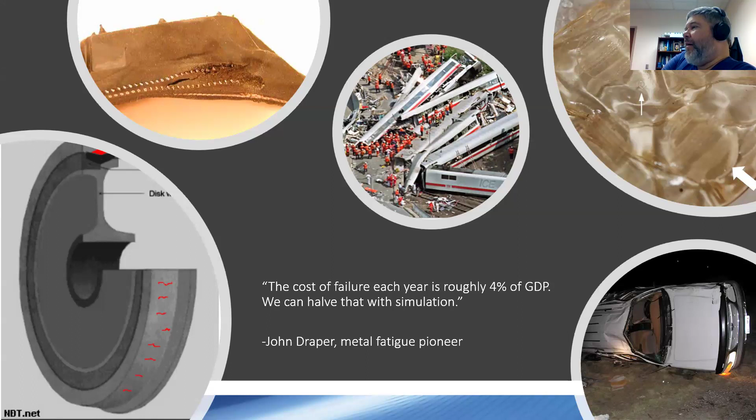Around the edges of the slide, you can see some of the more infamous rubber fatigue failures that have happened out there. In the upper left, there's a picture of a tire - that was the Ford Firestone tire failures from the early 2000s. There's a rail accident caused by failure of a special rubber tire wheel for rail that led to a train disaster. We think of the Dow Corning breast implant failures from the mid 90s. These are all examples of times when durability didn't work out right, and led to huge economic losses.

So here's a quick approach, the agenda for how we'll approach this. First of all, I want to talk about the technology, and not only the technology, but Endurica's approach to bringing this technology. The words I've used are accurate, complete, scalable - that's kind of our mantra for the Endurica tool set. We'll talk about the kinds of materials testing we can do, the kind of software. You should really think of Endurica more as a toolbox than a single workflow or a single piece of software - it's more a collection of things.

But the workflows that we provide are really aiming to give you tools that are very accurate. They've got the right material models, the right algorithms for doing damage analysis, the right materials testing, and they're solutions that are easy to quickly deploy when you need them. So just to briefly introduce the tools, but the meat of this talk is all about the impacts on business model and how we can quantify that.

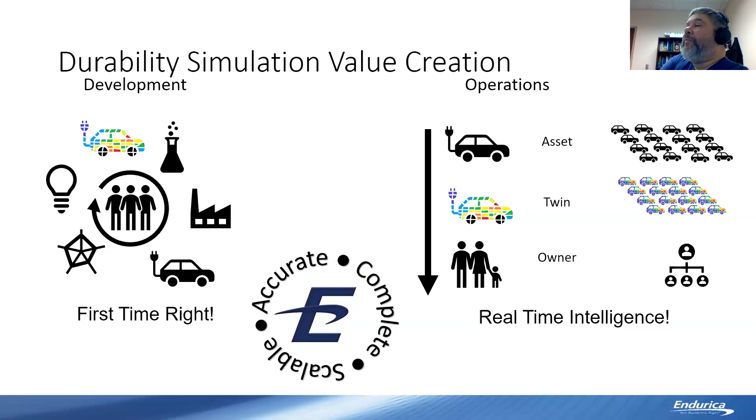So the Endurica tools really kind of support both types of application. And again, our mantra is accurate, complete, scalable. So let's talk a little bit about what we mean by accuracy.

First of all, on the material behavior side, rubber is very different from metals. There's obviously codes out there for doing metal fatigue, but even at a molecular scale, rubber is very different from metals. The material behaviors are very different. The math you use to deal with finite straining is very different from the small strain analysis, linear analysis that you use for metals. So you really need specialized tools for that.

These are just some images of a few of the types of things that we do. On the left, this is a crack growth rate curve that we've measured on some materials from Exxon Mobil. They have a thermoplastic elastomer called Santoprene, and we've got material models that can replicate and reproduce the kinds of crack growth behavior that their material has.

In the middle, there's what's called a Haigh diagram. It's a map of how the fatigue life depends on mean strain and strain amplitude. And that's for a project we did for the Army for one of their materials. That basically shows you the mean strain dependence of fatigue life for their materials.

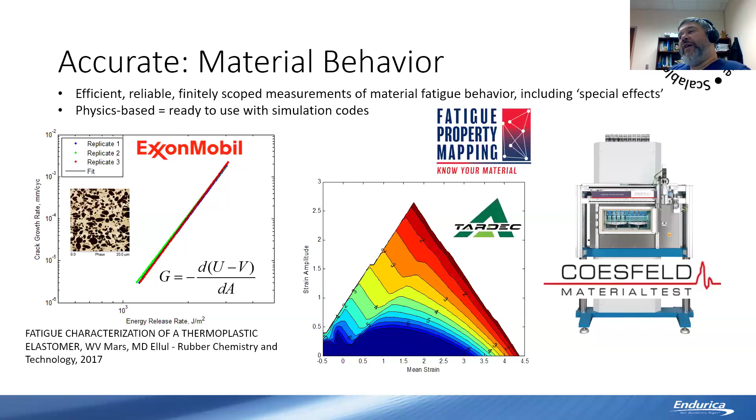We have a testing service called Fatigue Property Mapping that lets you measure all of the different special effects that rubber exhibits. We have testing instruments, and we partner with a German company, Coesfeld, for that. People can, and we'll get to this when we talk about scalability, but we've got offerings for if people just want to do a little bit of testing, we can handle that. If you want to do a lot of testing, we've got solutions for that as well.

Another component of the accuracy side of things is we use an algorithm called critical plane analysis. The idea in critical plane is that you assume that there's a crack everywhere in the part, and you evaluate every single possible crack that might exist in the part.

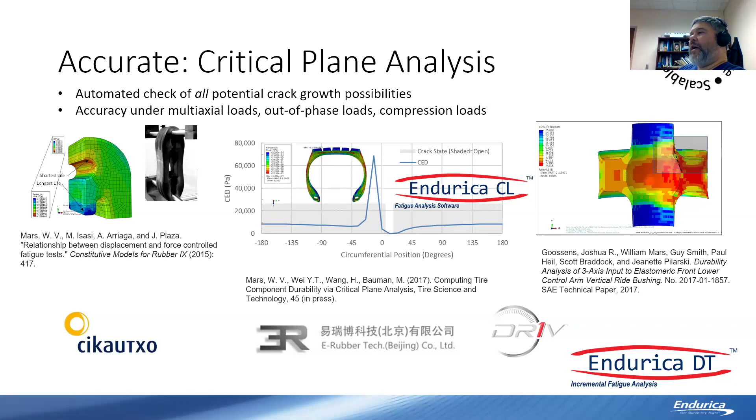What's really powerful about critical plane is that it allows you to make accurate predictions when you have multi-axial loads, multiple load input channels, loads that are out of phase, and accuracy when you have combined tension compression cycles. So when you have very complex loads, critical plane is the way to do it. This is not a technical talk, so I'm not going to unpack that very much, but that's a really important technology that's kind of core to our tool set.

The last point I'll mention on the side of accuracy is that our tools also allow you to deal with the variable amplitude side of fatigue problems. So if you want to work with road loads, a recording from the track, say, or maybe results from a vehicle dynamic simulation, we can handle that. We've got damage accrual algorithms that allow you to see where the damages come from, when it happens, so very, very powerful tools. These are in use by automotive OEMs to do their design work.

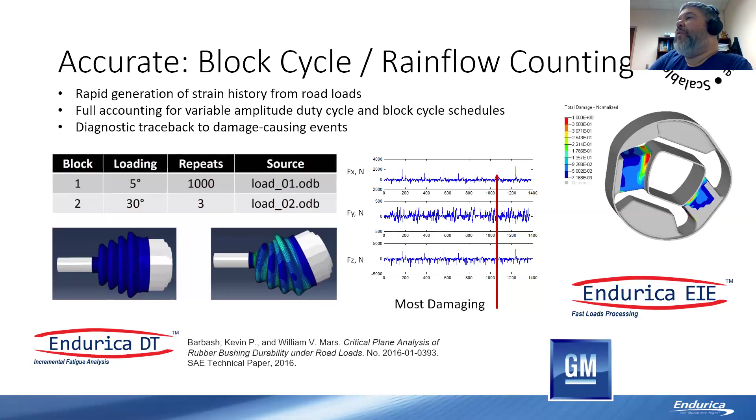So, not going to focus too much on the technical side. That was the accuracy. I mentioned accuracy, completeness, scalability. On the completeness side, I just want to mention that we've got three tools: one is called Endurica CL, one is called Endurica DT, and one is called EIE. CL is, you can think of that as kind of the core solver. DT is our incremental solver, and EIE is a tool that allows you to look at road loads.

These three tools allow us to cover pretty much any type of fatigue analysis problem you might encounter. If you want to do infinite life analysis, looking at a fatigue threshold and trying to stay below it, we support that with the CL tool. If you're doing safe life analysis, looking at number of repeats of some load case or schedule of load cases, we can do that with our CL and DT tools. And if you're looking at a damage tolerant approach, we support that too, tracking damage development through a series of load cases that's always changing, looking at the evolution of residual strength or residual life in the part as you put more history on it.

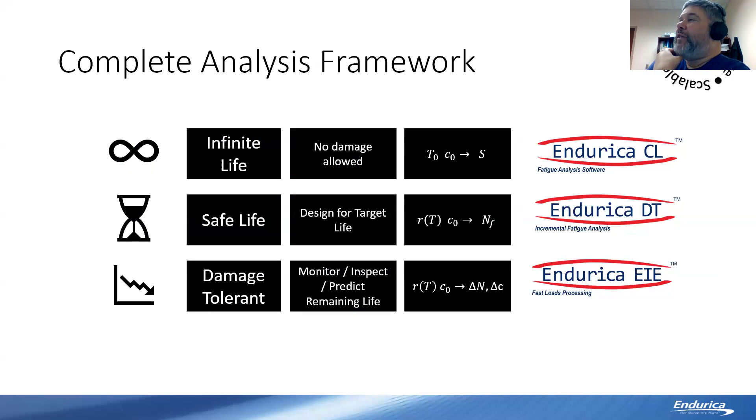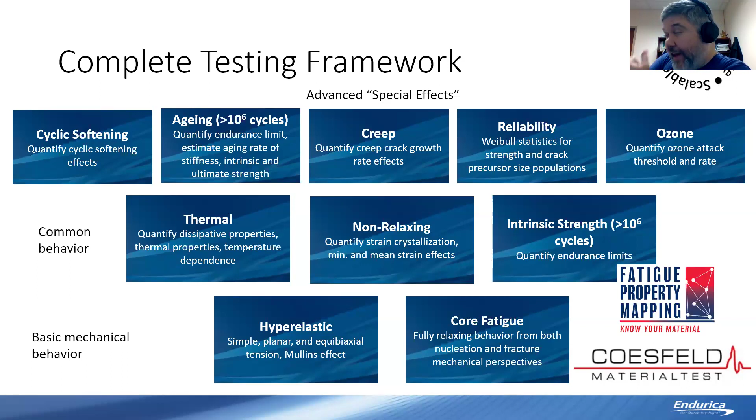This gets to the topic of completeness. We have a workflow for just about any type of durability problem you can bring to us. We have materials testing for all of the different components of the physics in the rubber. We have a service called Fatigue Property Mapping, where people send us samples of rubber, we test them, and give you back basically a material model you can use with our code to do fatigue calculations. We also help people implement these test methods in their own labs if there's a high enough volume of testing to justify that.

The last point on this topic is that our solutions are scalable. So if you're doing zero fatigue life prediction on day one, how can you very quickly scale up? For example, people sometimes start with just using consulting services, not even taking a license of the software, just coming to us with a project, and we can help you with that. We do have a materials database, so if you don't have the luxury of measuring the material properties for your material, maybe we could find something that's like your material in some ways.

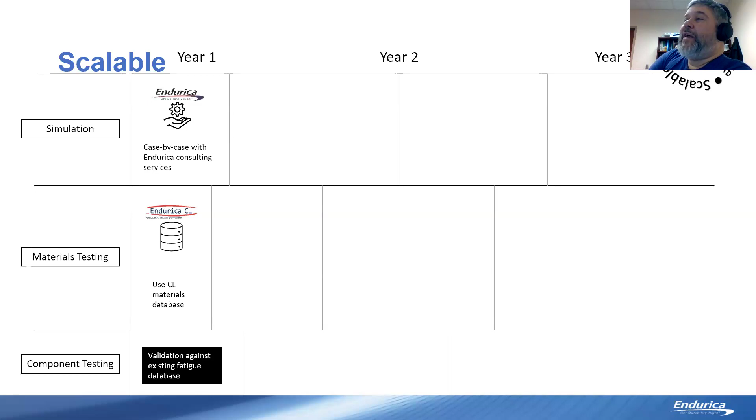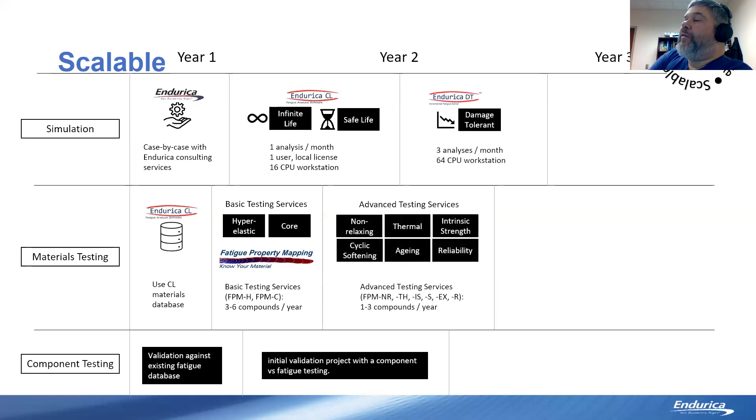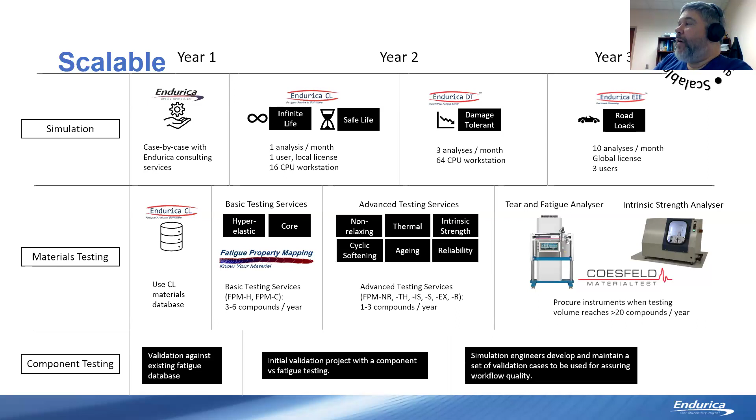But what's really beautiful is there's a path towards, as the need and the validation case gets strengthened, you can very quickly ramp up your adoption of the tools. A brand new user might be using our infinite life and safe life analysis approaches, just the basic testing to look at stress strain behavior and basic fatigue crack growth behavior. You might start some validation projects on a component to gain confidence with the workflows. At a more advanced level, you can talk about doing damage tolerant types of analysis, start adding in some of the additional physics that happen in certain problems, and eventually you can even get so far as doing analyses on full road loads using our tools. So there's a path to bringing these tools to bear on these problems at pretty much any scale.

Okay, so that's a quick introduction to Endurica, the company, and the basket of tools that we bring. So let's switch tracks now and talk about how these tools create value.

One way these tools create value is they provide a competitive advantage to part suppliers who are seeking the business of OEMs. Typically an OEM, a car maker, will put out that they'll seek bids on new business. They'll say, 'Hey, I've got a new car program coming out in a year or two, I need to get 1 million bushings to put in these cars. Let's take this to 3 suppliers and shop it around and see who can give us the best package.'

Obviously pricing is important in that, and other details, but in those packages there is often a significant engineering component. When people bid on these business packages, the timelines are often pretty short, but the OEMs really want some kind of validation or evidence that the design being proposed is going to be adequately durable under the intended use. They also want to know that the supplier has the expertise and the capacity that if an issue arises after the contract is put down, they'll be able to address the issue and make sure durability doesn't become a warranty problem for the auto supplier.

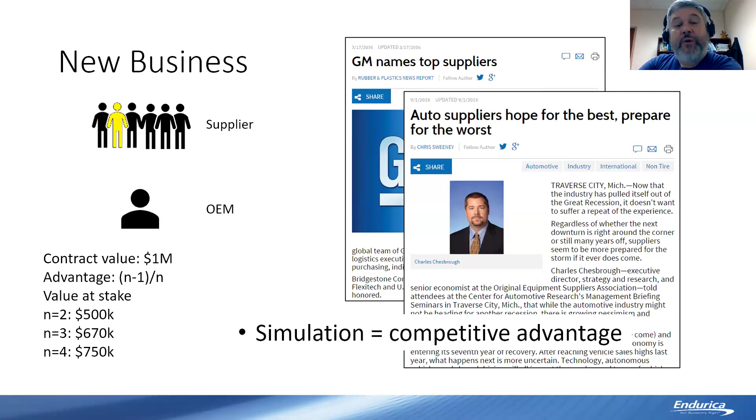A lot of the OEMs these days are pushing very hard to get people to show what they can do with simulation. Again, it has a lot of value in the new business phase.

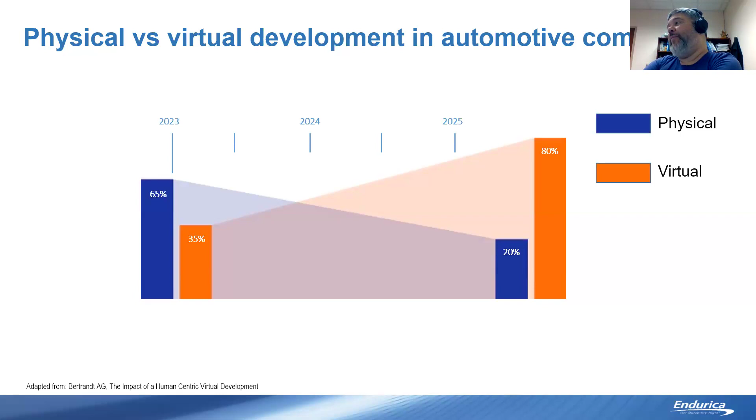This is a slide just showing the transition that we're living in right now. Some of the OEMs here in the States have given talks in conferences where they're talking about trying to really highly ramp up the virtual side just in the next 2 or 3 years. And again, it's all about engineering first, right?

This kind of is more related to the development process. So when you go to develop a new rubber part, there's a certain set of different types of efforts. You could think of a budget of how much effort goes into selecting the material, specifying all of the manufacturing details of the product, doing analysis to make sure it has fitness for loads and so on, building a prototype, doing all of the product testing.

You can lay out a budget, you can lay out a timeline. Having lived through this in a past life before I started Endurica, I think it would be maybe typical to say, if you're doing product development, maybe that's a team of 5 people. Each of those people is paid something like, in round numbers, $100,000 a year. And maybe that team takes 6 months to go through one iteration, right?

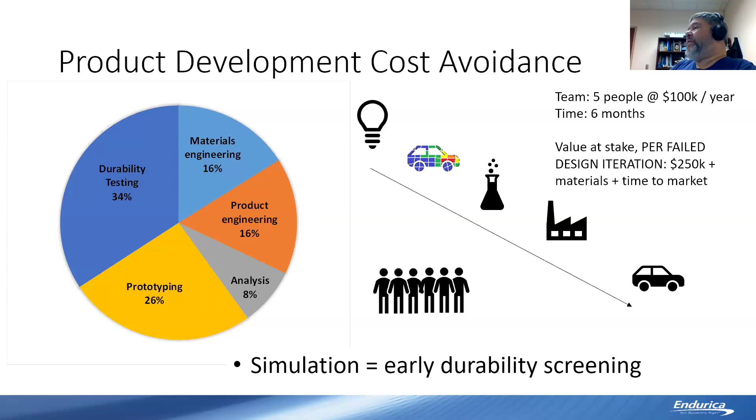Again, the value in simulation here can be estimated by what it saves you in terms of decreased risk of having to do another expensive iteration. And so this, like I say, again, simple model for calculating what that might mean in your context. You change the numbers to what your situation is, but that's another way to think about it.

We could also talk about lightweighting, and there's lots of ways to think about lightweighting. Of course, we've already talked about how to think about it in terms of competitive advantage, but you could also think of it in terms of a lot of rubber companies actually focusing quite a bit on just how to take material out of a part. The material itself has a per pound or per kilogram cost.

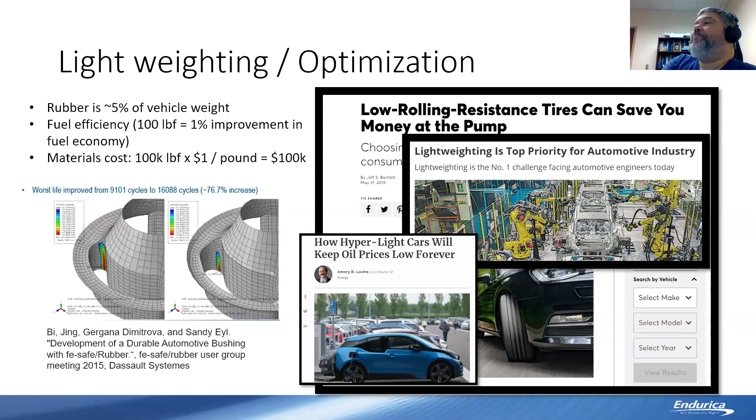If you know how much weight you're going to take out, you know how much material you're saving, you can calculate a contribution there. And this isn't even counting - I think usually if you make a lightweight part, that also has value to your customer, which isn't included in this kind of calculation. But anyhow, this is at least a conservative way to estimate. Now for rubber, this is huge.

This next one - material selection. There's been studies done that show that when you have product failure in the rubber industry, about 40 to 45% of the time in this study, the reason for failure can be attributed to poor selection and poor specification of the material. You specify a rubber compound that's too soft or too hard, not enough carbon black, too much cross linking. Poor material selection is just huge.

It's not surprising that this happens. Rubber is a very complicated material, and in the lab, rubber labs tend to use a lot of very simple tests that are in some ways oversimplified - they don't reflect the true service conditions of the part. So getting these decisions right more frequently can have a big value.

How do you estimate the value of that? Well, let's say you have 10 rubber compounders in your materials group, and you've got some salary for those guys. Let's say you change what I'll call the hit rate - before you start taking this seriously, maybe you're getting the right material and right application 50% of the time. If you can increase that from 50% to 2/3, there's a real economic value to that.

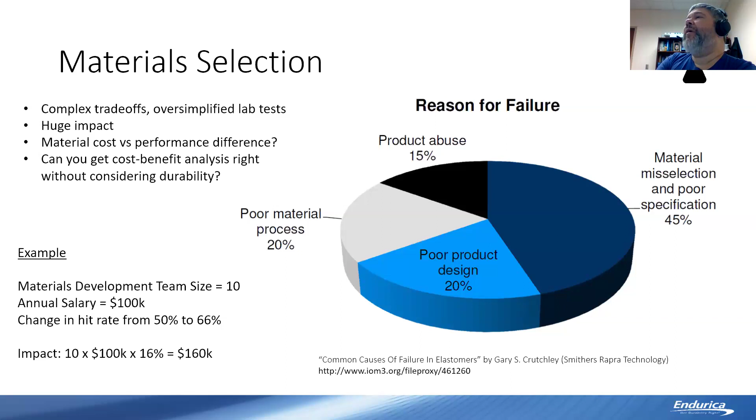Sustainable materials - sustainability is a huge topic these days. One of the difficulties when you want to implement a sustainable material strategy is that it requires you to change out materials that work for materials you don't know if they work. Anybody in development knows that most things you try don't work, so that's where these tools can really help - helping to sort the ones that will work.

I saw an interesting study online when I was looking for ways to put numbers on these kinds of things, and I found one study that showed about half of consumers are actually willing to pay more for a sustainable product. There's a pretty large group of people who would pay 25% more, and even a small group who would pay twice - 100% more - if they felt the product was sustainable. So there's definitely value in that, and the way simulation tools help with that is again helping with the get-it-right-the-first-time type of tactic.

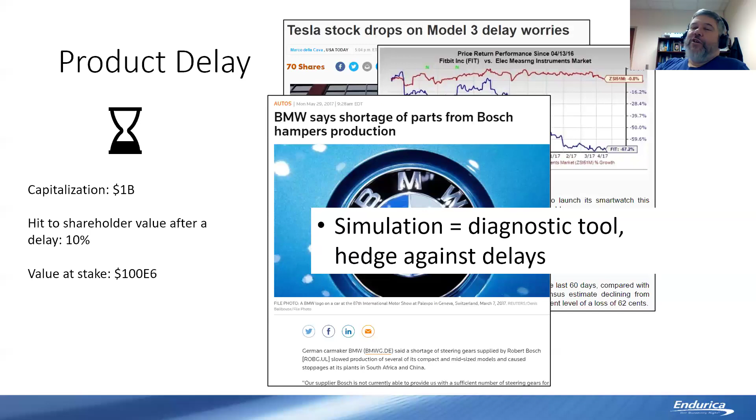That has to do with your first mover advantage in business, and that certainly could justify this kind of thing. But again, just another model for thinking about what durability might be worth. If you don't have durability, you don't have a product.

Another one I'll mention is what I call OEM warranty responsibility. A lot of part suppliers put their parts into a car, and the contracts they have with the OEM often have some kind of warranty provision, where if these parts come back from the field, there's some kind of economic adjustment. You're going to pay us for things that fail. The OEM needs the supplier to be responsible for the quality end of things and for failure.

So another model you can build out very simply to look at the value of getting these things right is to look at what your warranty exposure is. I think most companies track the cost they incur due to returned parts, failed parts from the field.

So if you had $10 million worth of parts out in the field, and you know some percentage of those are going to fail, let's say if you make the right decisions you can reduce your adjustment rate by 1%. Well, 1% of 10 million bucks is a person's salary for a year. So it's worth it to pursue these kinds of initiatives that will help you resolve these types of issues.

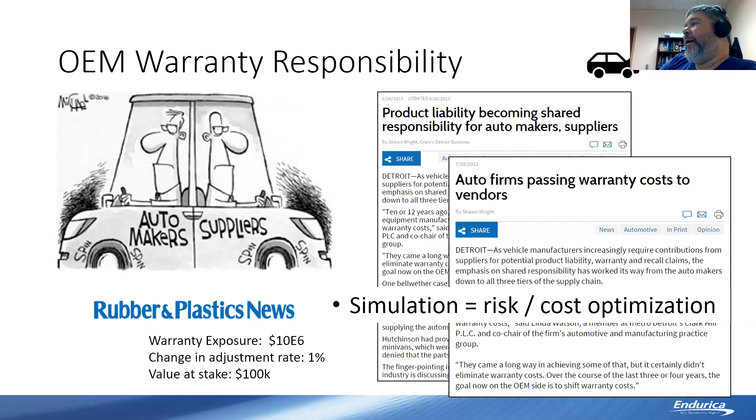So anyhow, that's a pretty good list, hopefully I've given you some ideas for when the boss says, well, why should I care? Hopefully I've given you some ways to sharpen your pencil and come back with some really sharp and incisive insights into how these things can benefit your business.

To summarize what we've said, you can look at things that are changes to the revenue side of the equation. We talked about competitive advantage, cost avoidance on the development side, lightweighting and sustainability, avoiding product delays, dealing with warranty type failures, and testing capacity in terms of less iterations. Take these models that we've given you and plug in your own numbers.

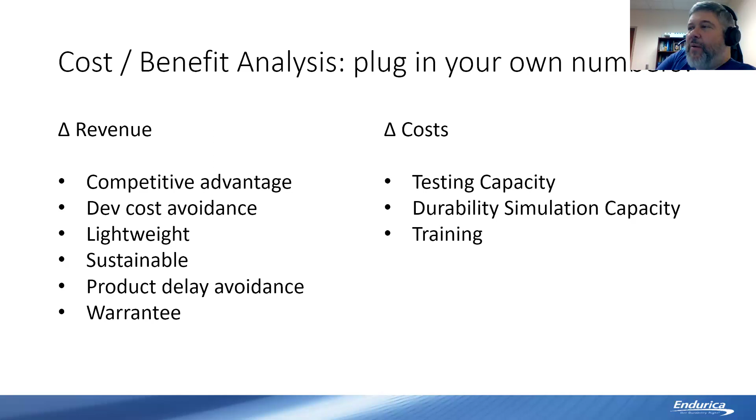I also want to mention some ideas of what I call fast tactics. So you get off this webinar and you think, that's all nice and theoretical and I can calculate a number, but what can I do at my company today that might start to create value? So I get a simulation tool, what do I do with it to immediately create some value where I am? This slide is just a few ideas on things that you might try to do.

One would be to implement durability simulation as part of your new business process. So whoever's writing the proposals to the OEMs for part contracts, you probably want to make sure durability simulation is part of that process. Being able to take the engineering package you get and come back a week later saying, we know this can pass and here's why, here's your loads and here's our analysis, is very valuable. And not so hard to implement these days.

Another quick tactic you could use is to do what I call a design audit of durability sensitivities on your existing product line. No doubt you have a bunch of existing products, and if you were to run simulations on your current products, maybe the ones that have the worst durability issues, do an audit and figure out, hey, what would be the sensitivity to durability if I changed out the material?

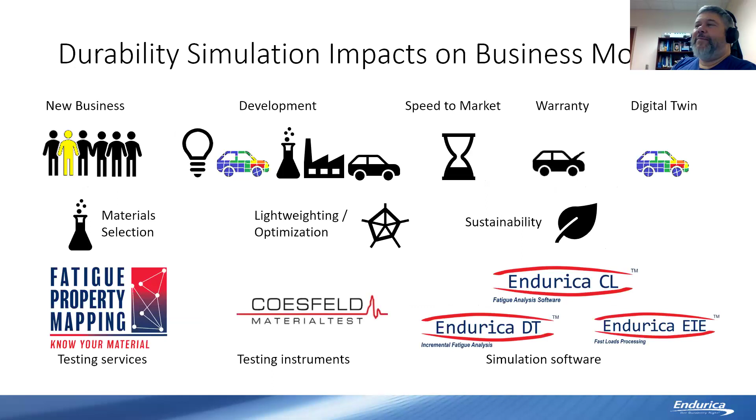Okay, so that's kind of the meat of the presentation, and this is just a summary of what we said already. So I'll stop here and open the floor up for any questions that may be out there.